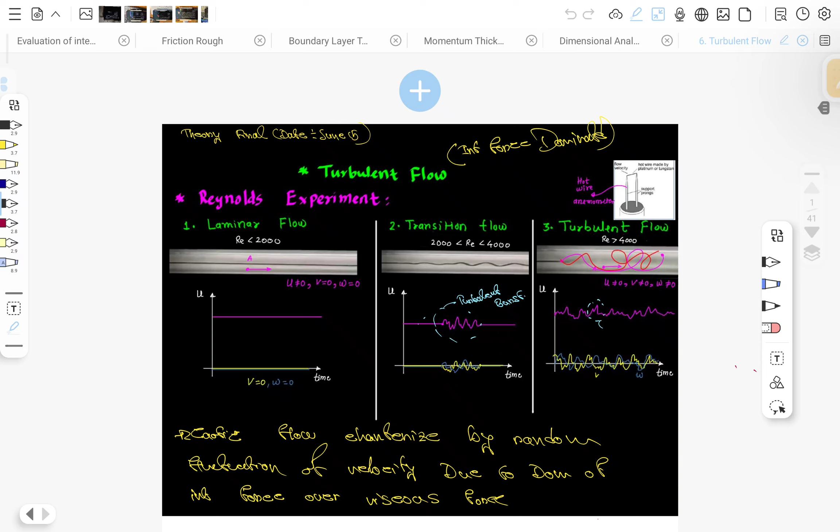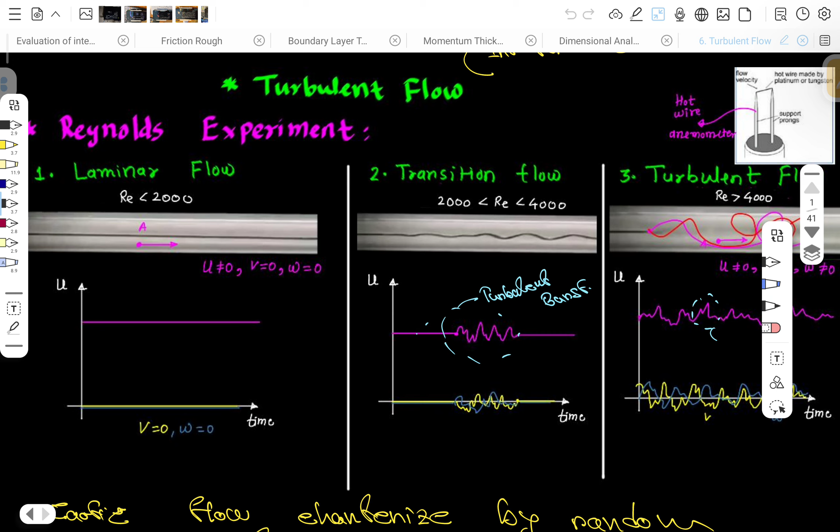Turbulent flow is random fluctuation of velocity due to dominance of inertia force over viscous force. The characteristics are heavy mixing, the motion of fluid particles is highly unpredictable, even the overflow of the fluid is unpredictable. All the components of velocity are present in turbulent flow.

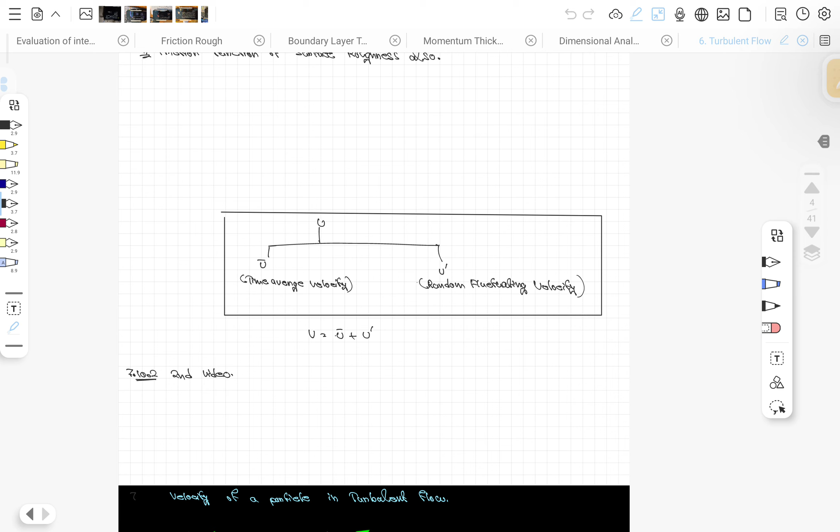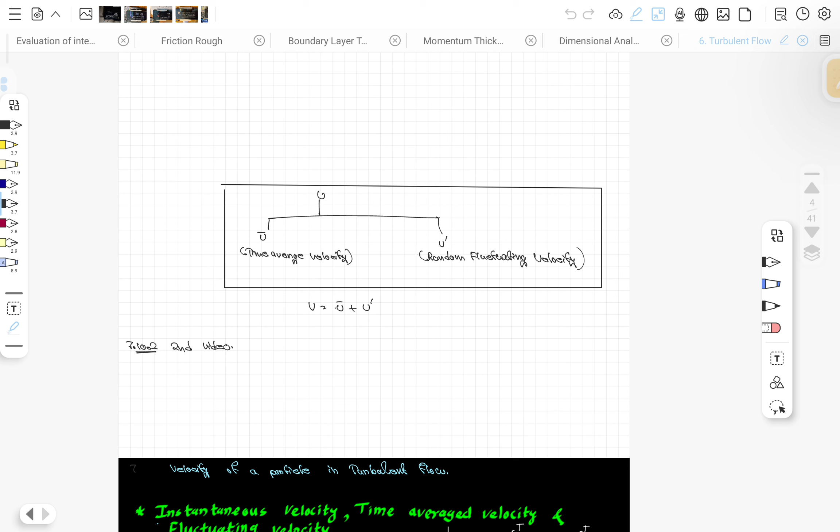Now there is velocity. There are two types of velocity: time average velocity and random fluctuation velocity. Time average is denoted by u bar and random velocity is denoted by u dash. Total we can say u equals u dash plus u bar. In the next part we can get instantaneous velocity, time average velocity, and fluctuating velocity, all those things.

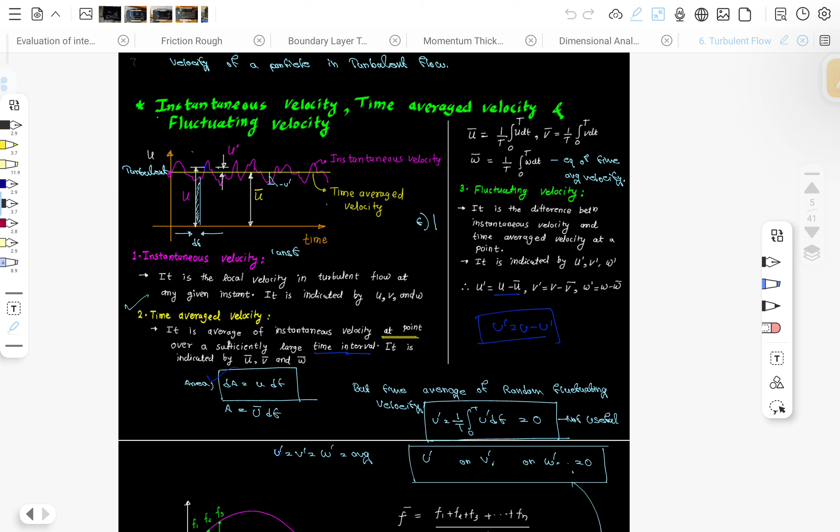So what is instantaneous velocity? It is the velocity of the turbulent flow at any given instant, and it is indicated by u, v and w. Now coming to the second one, time average velocity.

It is the average instantaneous velocity at any point over a sufficiently large time interval. It is denoted by u bar. So dA equals u dt, that is u bar dt.

That's how u bar equals 1 by t, integral from 0 to t of u dt. Similarly v bar equals 1 by t, integral from 0 to t of v dt. That's how we formulate the velocities.

Now fluctuating velocity: it is the difference between instantaneous velocity and time average velocity, that is u minus u bar, that is the fluctuating velocity. The average random fluctuation, u dash, is 1 by t integral from 0 to t of u dash dt, which is not useful here.

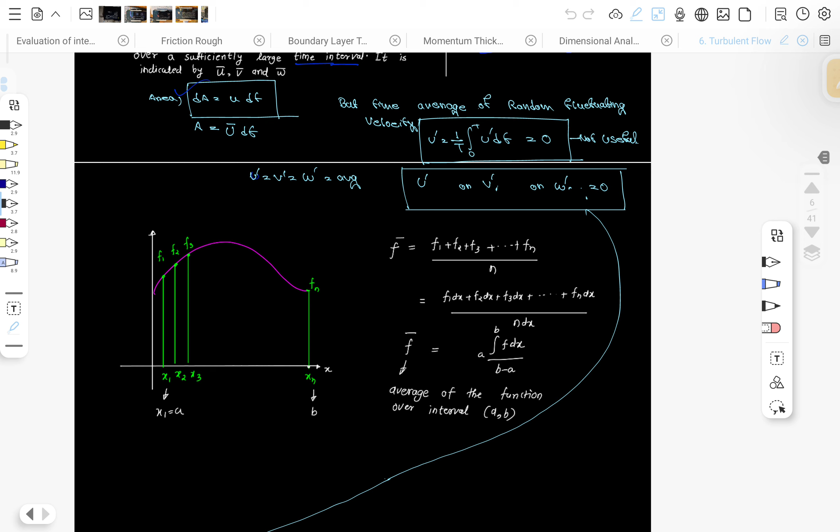Now the most important part: we take the square and add it up, so u dash square equals 1 by t, integral from 0 to t of u dash squared dt. Now most important is the RMS value, root mean square, u RMS squared equals 1 by t integral from 0 to t of u dash squared dt. That's the RMS of the random fluctuating velocity.

Intensity of turbulence is 1 by 3 times the sum of u dash squared, v dash squared, and w dash squared, that is the RMS velocity squared. But we can't eliminate the 3.

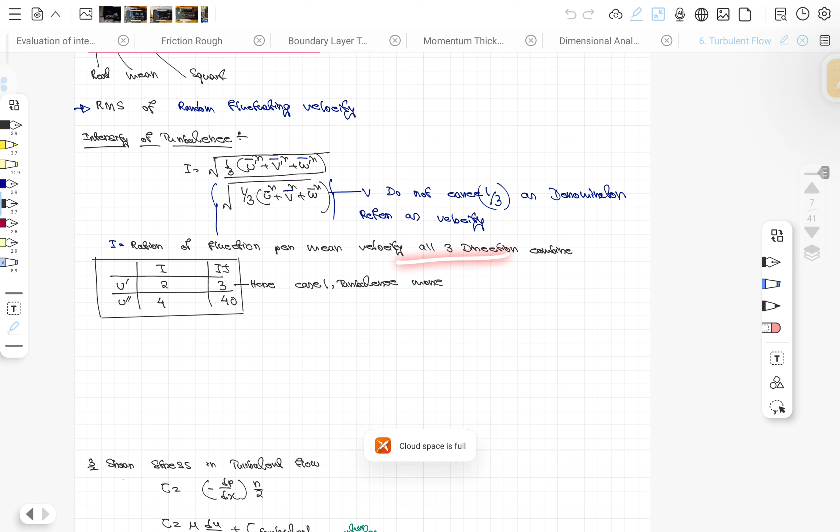Now the shear stress in case of turbulent flow: tau equals minus dp by dx into r by 2, as seen with the boundary layer thickness. But here there's one more term, tau equals mu into du by dy, similar to laminar flow, but there is also a turbulent shear stress, which is due to momentum transfer.

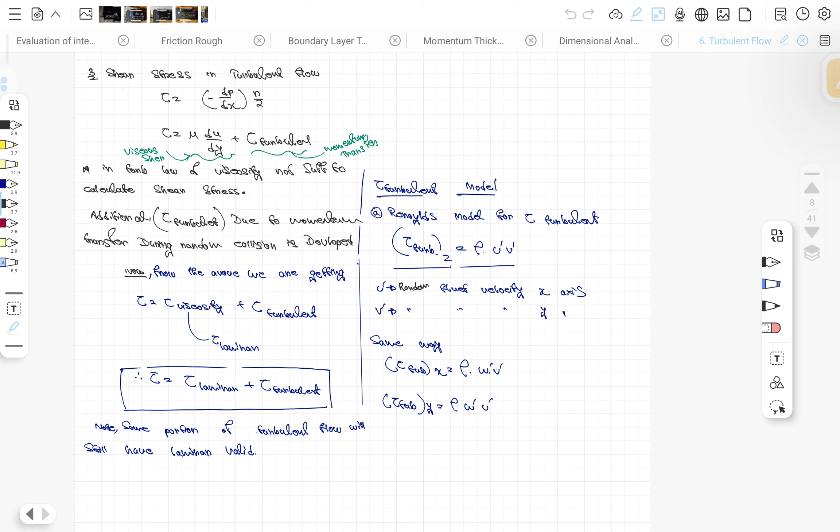So in turbulent flow, viscosity alone is not sufficient. Additionally, due to momentum, there is random collision development. So overall we get tau equals tau viscous plus tau turbulent. Both of these add up to give the total shear stress: tau total equals tau laminar plus tau turbulent.

So Reynolds model for tau turbulent: tau turbulent equals rho into u dash v dash. That's not very important. U dash is random fluctuation in the x axis, v dash in the y axis. Similarly, tau turbulent can be rho times w dash v dash, or rho w dash u dash.

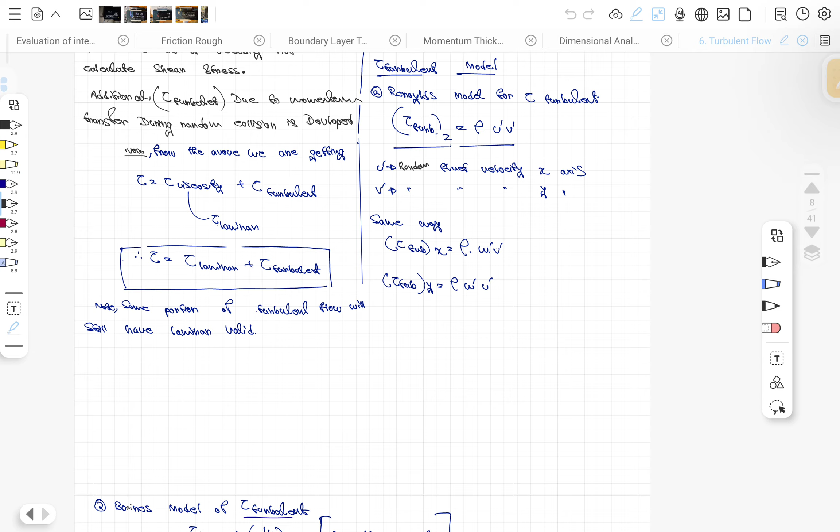Now the Boussinesq equation, I don't think it's very useful, but you must remember this: eta is eddy viscosity, so mu into eta is eddy viscosity du by dy. So mu into du by dy happens, but in this case it's mu plus eta into du by dy.

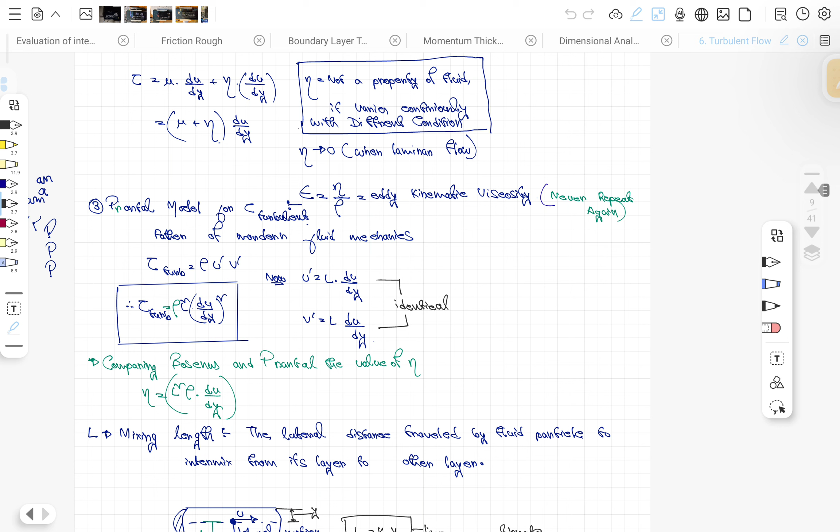It is not a property of the fluid, it varies continuously with different conditions. When eta is 0, then it reduces to the laminar case. This is the Prandtl model. There's also a comparison with the Boussinesq model, which I also don't think is very useful, but just have a look.

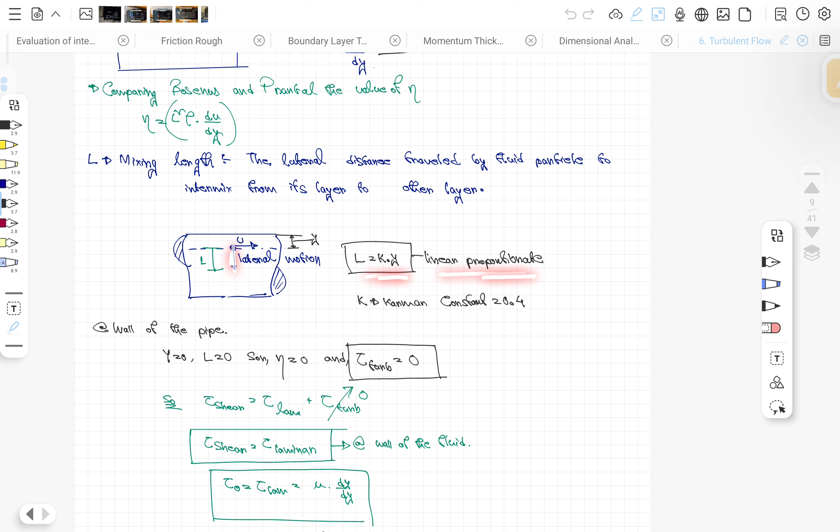There is mixing length, L equals K into Y, which is a linear proportionality for lateral motion, L equals K into Y. K is the Kármán constant, that is 0.4, and at Y equal to 0, adjacent to the layer, there is an L0 distance.

The eta value would be 0, tau turbulent also will be 0 because there is a laminar flow that will happen there. So the tau shear stress will be laminar plus turbulent. So tau shear will be tau laminar only, because there will be no turbulent flow where y, the distance from the wall, is 0. So tau 0 equals mu into du by dy.

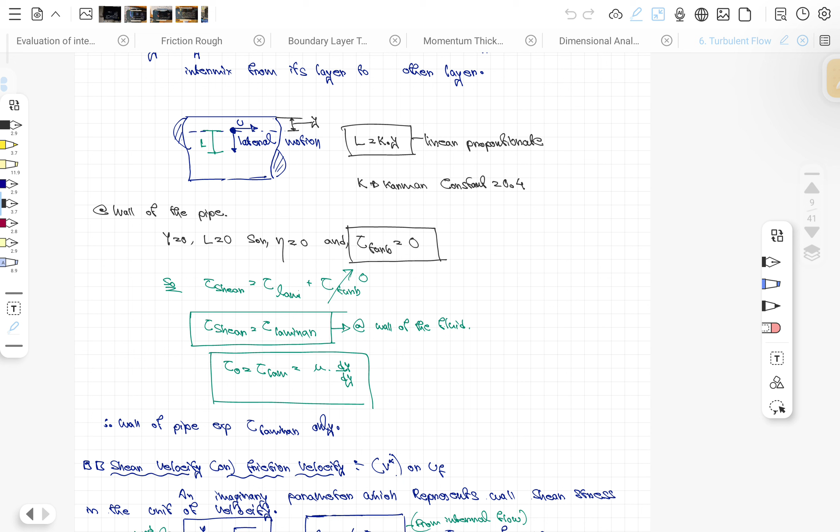So now shear velocity or frictional velocity, that is V star. The standard formula is V star equal to root over tau 0 by rho. F equal to 4 tau divided by half rho V square. I think it is internal flow we are getting. So tau 0 by rho equal to F by 8 dot V square.

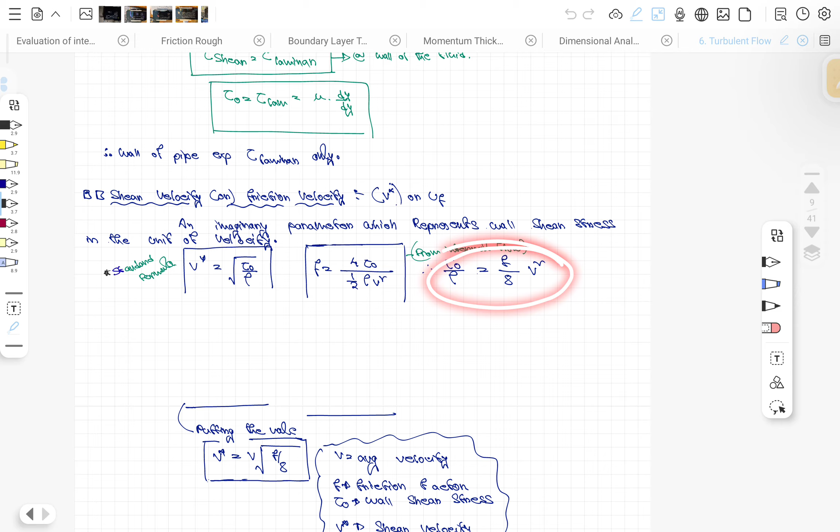Okay. Now putting all these values, we are getting the main equation. V star, the frictional velocity, is V into root of F by 8. F is the friction factor, V is the average velocity, and V star is shear velocity.

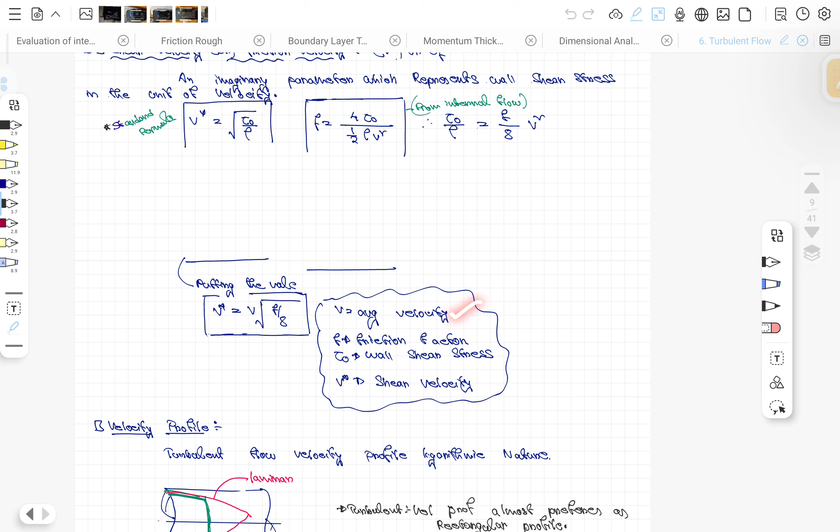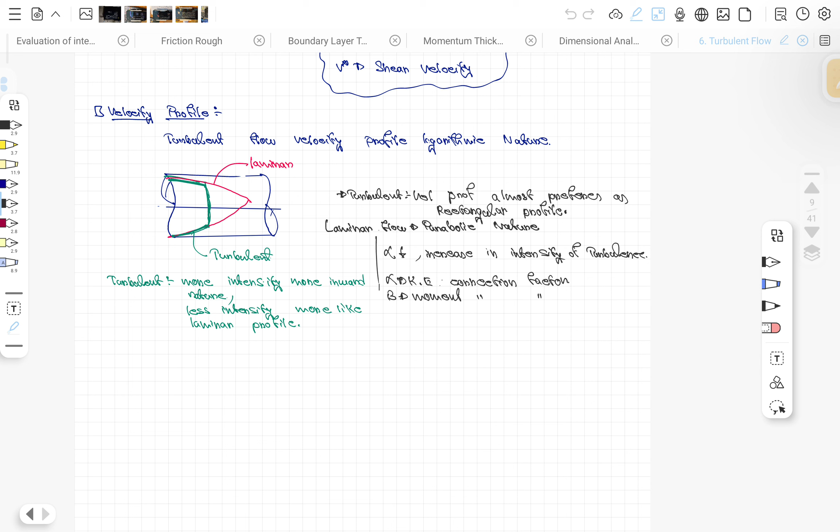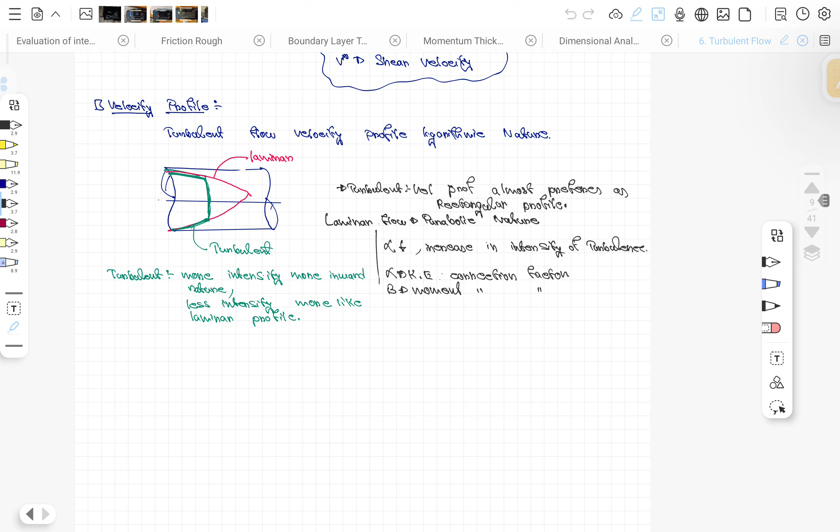Okay, velocity profile for the turbulent flow, this is the velocity profile for turbulent and laminar. The turbulent velocity profile is almost like the rectangular profile. Laminar is almost like parabolic. So as the alpha value is increasing, and what is alpha? Alpha is the kinetic energy correction factor that you need to remember. More intensity, more inward, and less intensity, more like laminar profile.

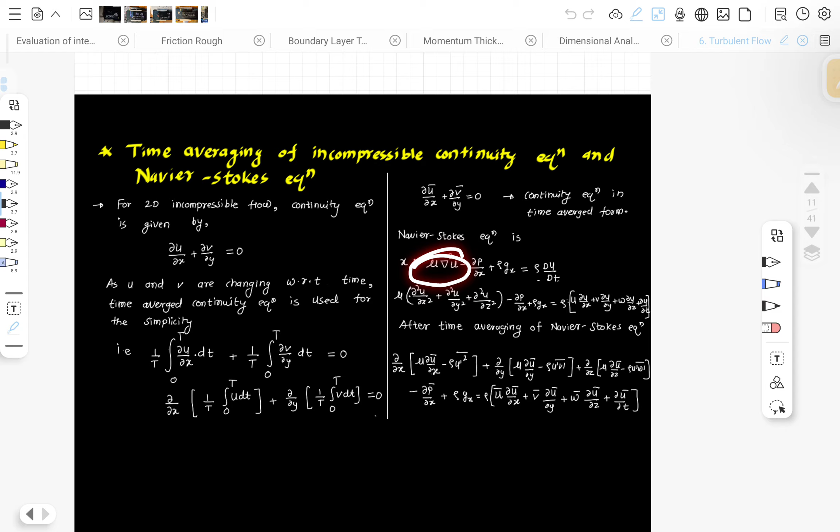Okay, now the Navier-Stokes equation is also useful for these cases. You just remember: du by dx plus dv by dy equal to 0, that is the continuity equation. And the Navier-Stokes in x is rho Du/Dt equal to mu into delta square u minus dp by dx plus rho gx. That also we have seen in many cases we have been applying.

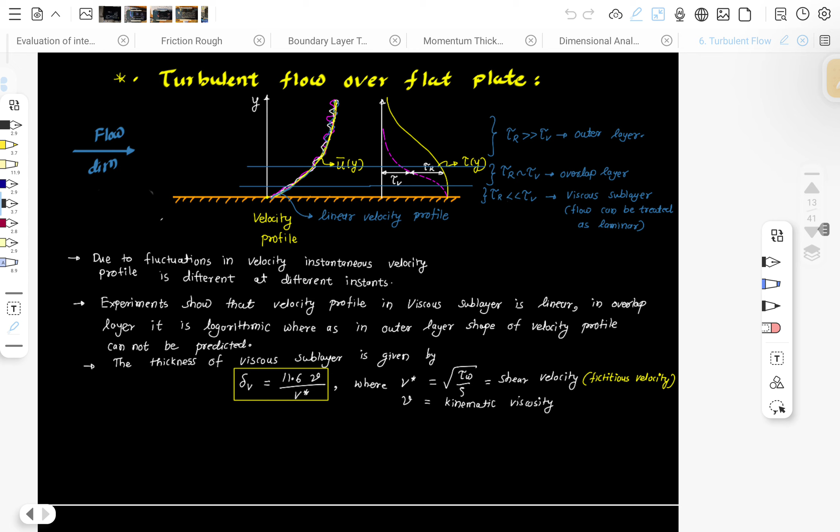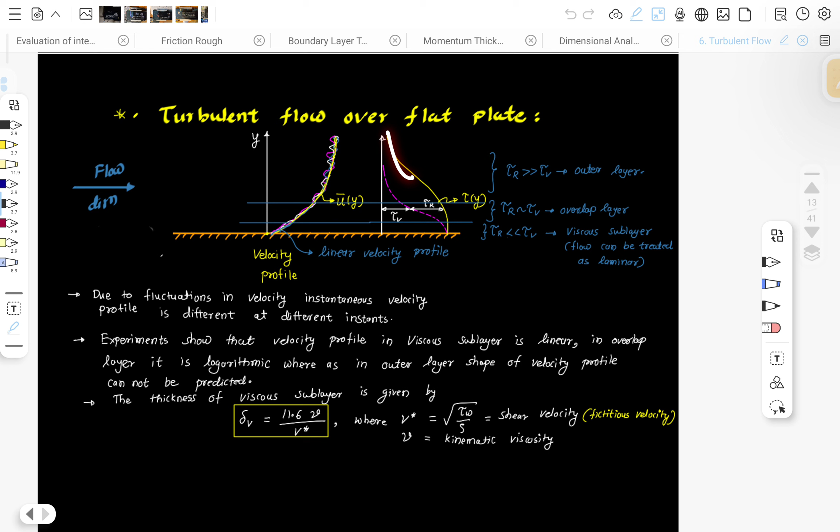So now turbulent flow over a flat plate. How is it happening? Experiments show the velocity profile has a viscous sublayer, overlap logarithmic region, and outer region where the velocity profile cannot be predicted. The thickness of the viscous layer is delta V, that is 11.6 nu by V star. Shear velocity V star equals root of tau W by rho, and nu is kinematic viscosity.

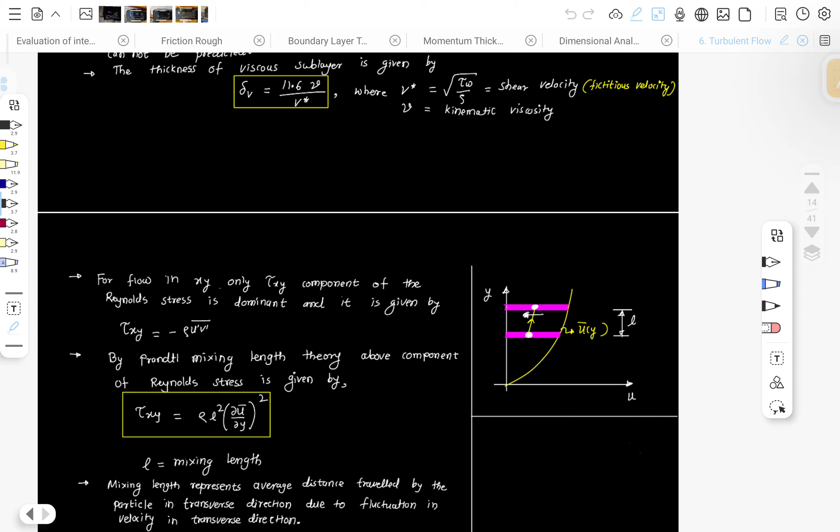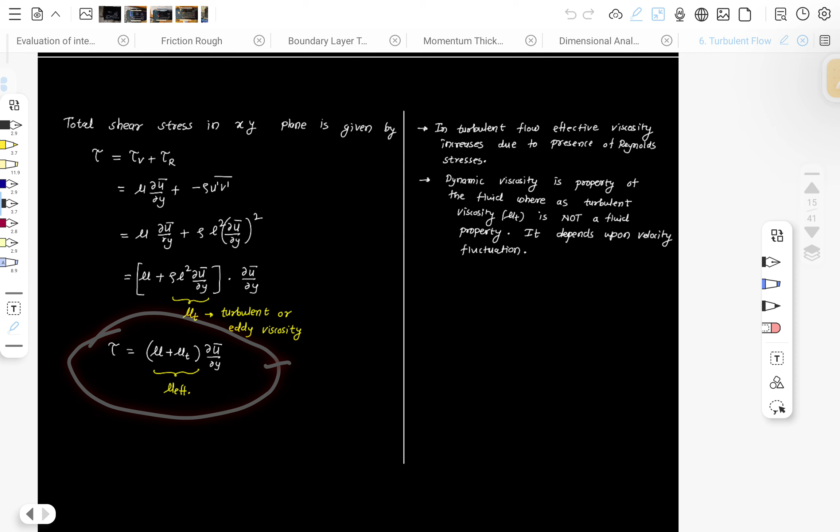The xy component of the Reynolds stress is determined by tau xy equal to minus rho u dash v dash. By Prandtl mixing length, the Reynolds stress component is given by mixing length. So basically tau R equal to mu turbulent into du by dy. The eddy viscosity depends on the velocity fluctuations.

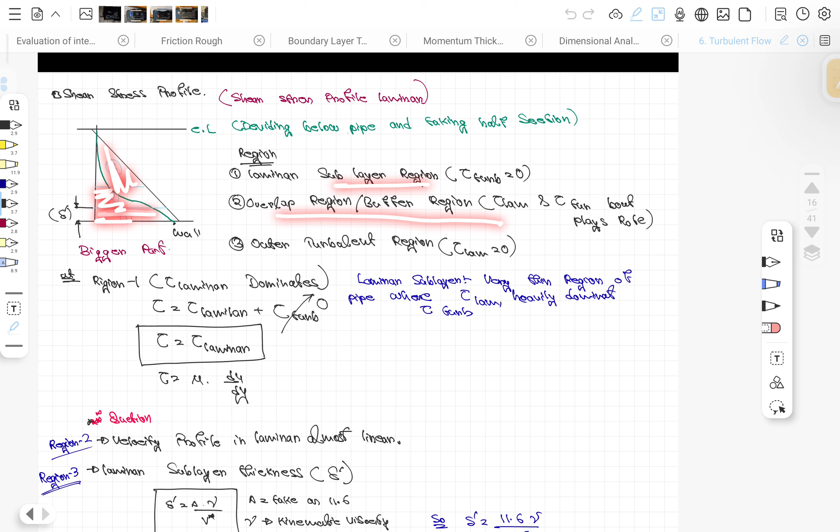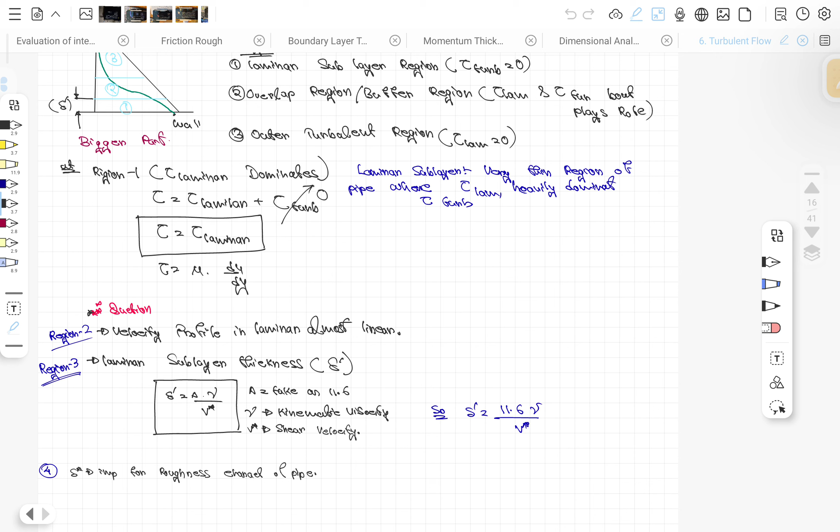Now shear stress profile, there are three regions. One is the laminar sublayer region, two is the overlap region, three is the outer turbulent. In the outer layer tau laminar is 0. In region 1, turbulent is 0, it is mu du by dy. Velocity profile in the laminar sublayer is almost linear.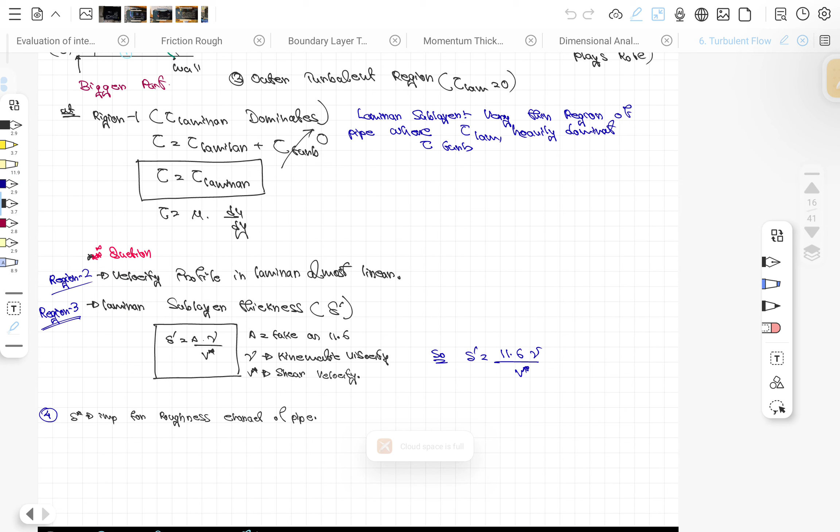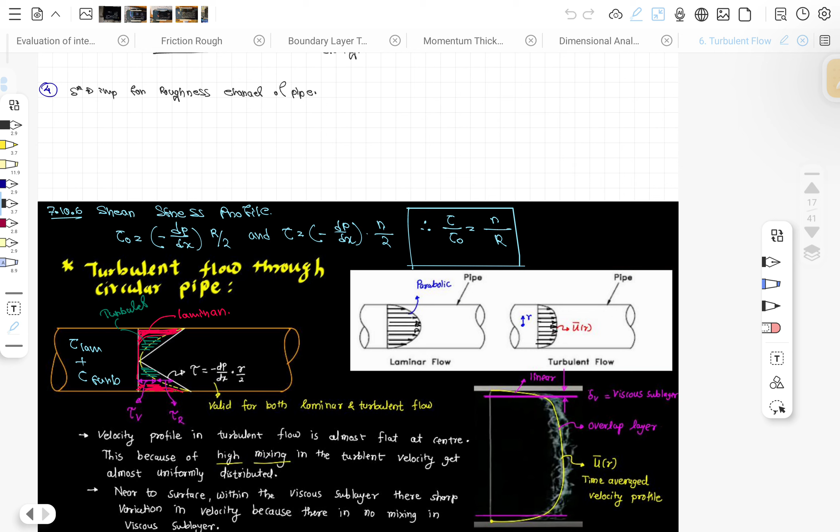Laminar sublayer thickness, that is delta star equal to A into nu by V star, that is 11.6 nu by V star. It is important for roughness characteristics of the pipe. We know that tau equal to minus dp by dx into r by 2. Now tau is tau laminar plus tau turbulent. This is the part where we are getting laminar flow, and this is the part where we are getting turbulent flow.

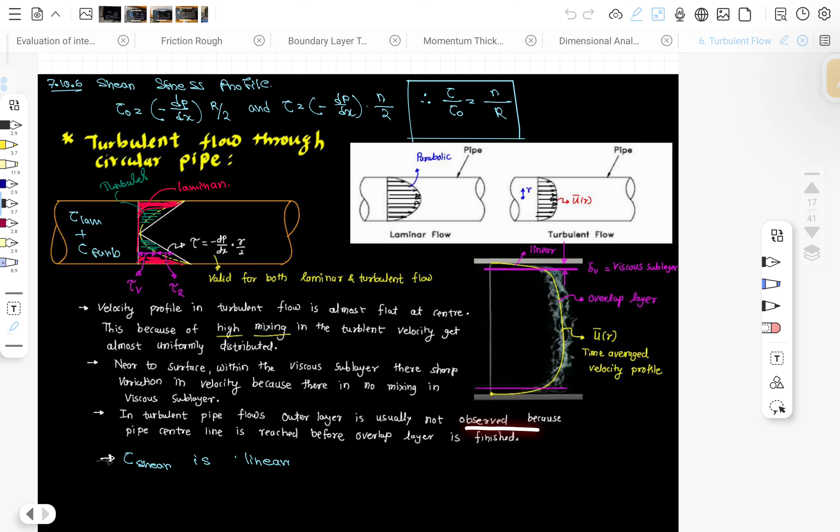So the velocity profile in turbulent flow is almost flat at center, because high mixing gives almost uniform distribution. Near the surface within the viscous sublayer, there is sharp variation of the velocity. In turbulent pipe flow, the outer layer is usually not observed because the pipe centerline is reached before the overlap finishes.

Okay, the logarithmic profile has different equations for smooth and rough pipe. It is approximated by the power law profile u equal to u max into 1 minus r by R to the power n. Now the topic is the roughness of the pipe. There is a laminar layer, and above this is the turbulent flow. So there is no eddy formation at the surface roughness. So the surface is hydrodynamically smooth.

So E is the average height of the irregularity. So E is the surface roughness. Remember, many times it's come. E is the surface roughness, the average height of the irregularity in the inner wall, so this is called E. Okay, E or K, something we got.

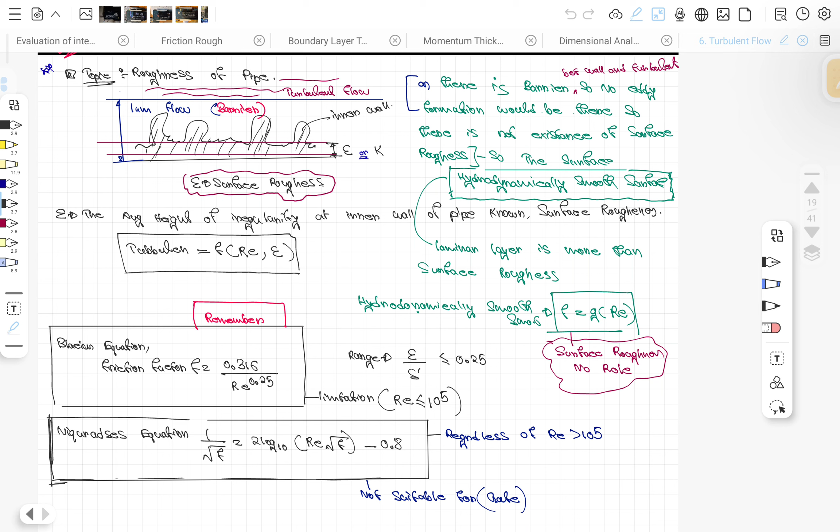Turbulent flow is a property of two things. That is, one is Reynolds number, another is surface roughness, that is denoted by K or epsilon, whatever you can say. Laminar layer is more than surface roughness. So what we are saying is the laminar sublayer is more than the surface roughness.

Okay, hydrodynamically smooth surface, that is a function of only Reynolds number, because E will not play any role. And remember Blasius equation of the friction: the friction factor F is 0.316 divided by Reynolds number to the power 0.25. And the range for this is E by delta star. Delta star is the laminar sublayer thickness, and E is the surface roughness; that has to be less than 0.25.

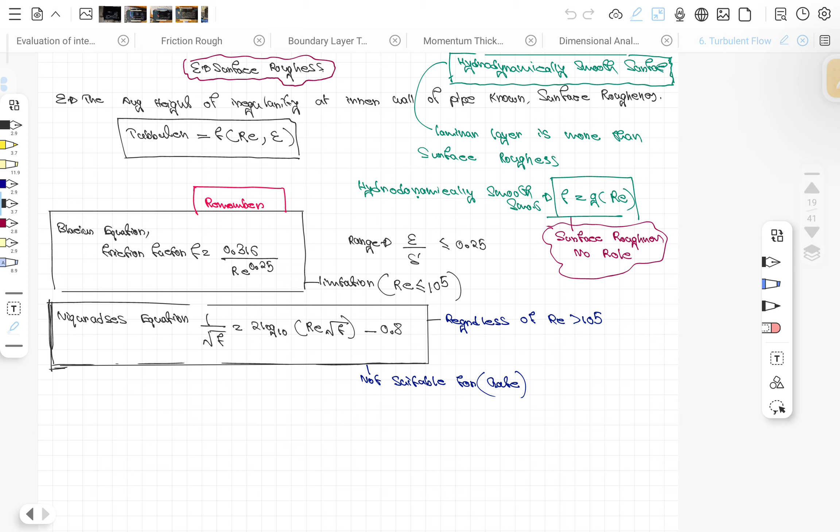Okay, so this Blasius equation, as far as I know, is valid when Reynolds number is less than 10 to the power 5. Okay, hydrodynamically smooth surface, the next thing that we are getting. So for a hydrodynamically smooth surface, K by delta is less than 0.25, and a rough surface is where K by delta is greater than 6.

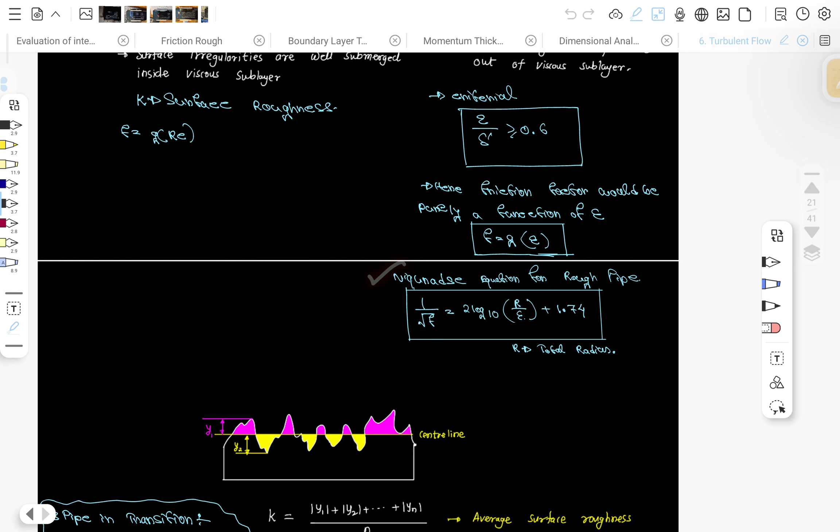So experimental data: if E by delta star is greater than 6, the friction factor depends only on E. Nikuradse's equation is 1 by root F equals 2 log 10 R by E plus 1.74. So I don't think it is very much needed. So pipe in transition: there is a central line, a laminar sublayer and surface roughness. So E by delta star from 0.25 to 6, that is the value.

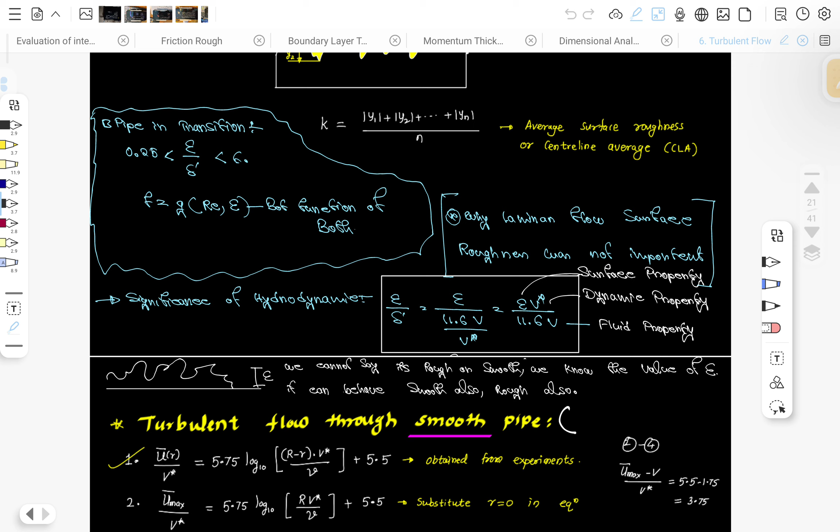So while in laminar flow surface roughness was not important, here's the question. So delta star equals 11.6 nu by V star, where V star is the shear velocity. Okay, now turbulent flow, there are a couple of equations that are important that I will share. So let me just remove this thing first.

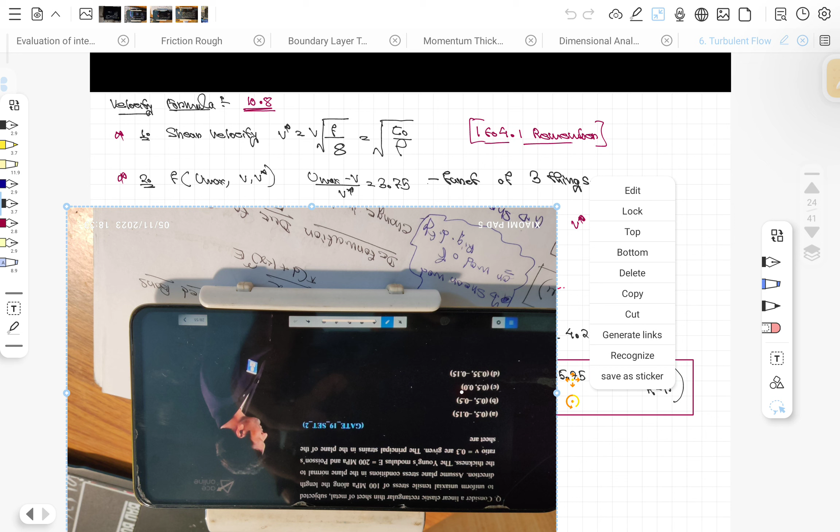Now start. Shear velocity V star equals V into root of F by 8. Also you can write root over tau 0 by rho. So Umax minus V by V star equals 3.75, where F is the friction factor. Umax by V equals 1 plus 1.43 root F, putting the value of V star.

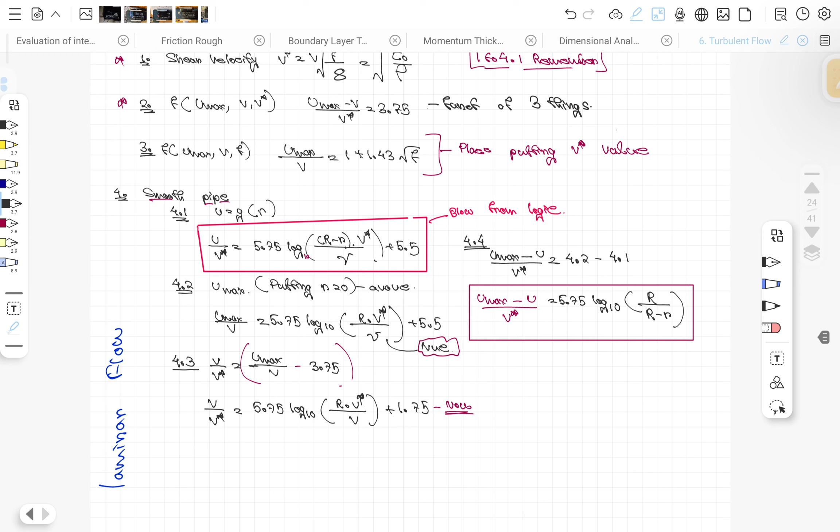So for smooth pipes, U by V star equals 5.75 log R V star by nu plus 5.5. And putting the above value, Umax by V star equals 5.75 log 10 R V star by nu plus 5.5. So V by V star equals Umax by V star minus 3.75, and V by V star equals 5.75 log R V star by nu plus 1.75. So these first four equations are important, but we don't need to remember them.

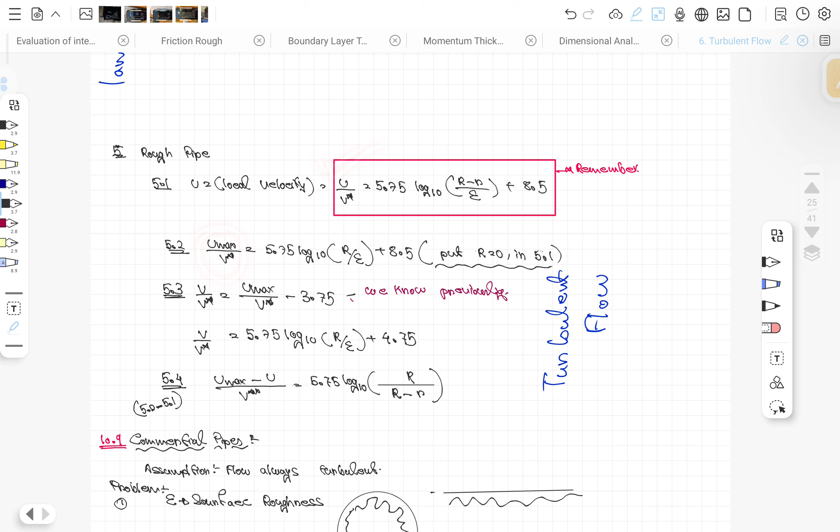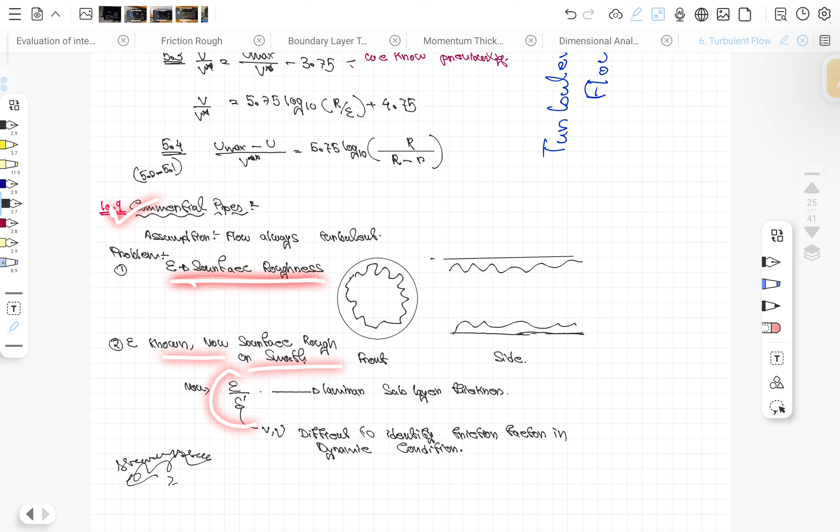Then we are coming to the rough pipe case. So the first equation that is very important is U by V star, the velocity divided by the shear velocity, equals 5.75 log 10 R by epsilon plus 8.5. And Umax by V star equals 5.75 log R by E plus 8.5. Then there is commercial pipe, where the surface roughness is known as the equivalent surface roughness.

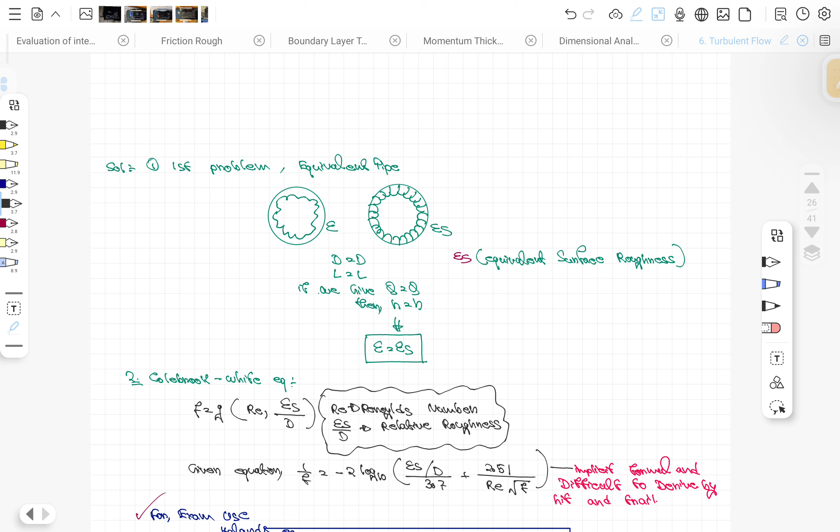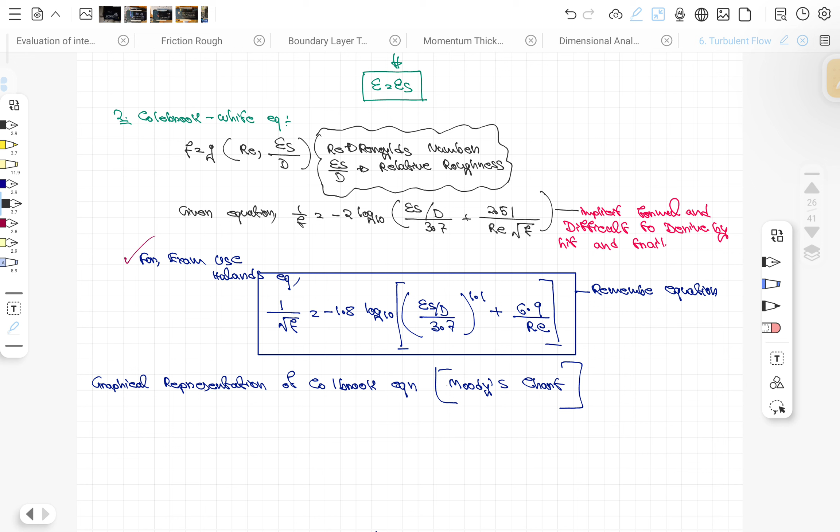So now, equivalent pipe surface, E equals E s for the equivalent. Now the Colebrook equation is an implicit formula, solved by hit and trial: 1 by root F equals minus 2 log 10 of E s by 3.7 D plus 2.51 by Re root F. That is, for the equivalent pipe, E s is the surface roughness. Now the term is E s by D.

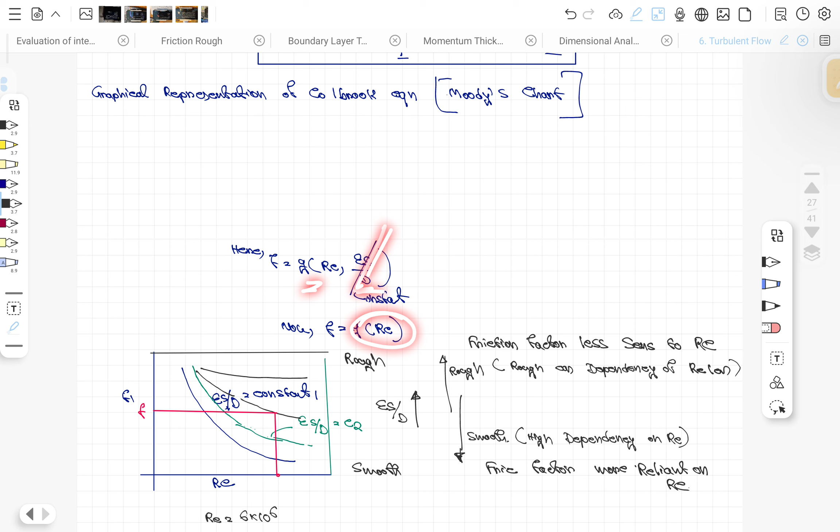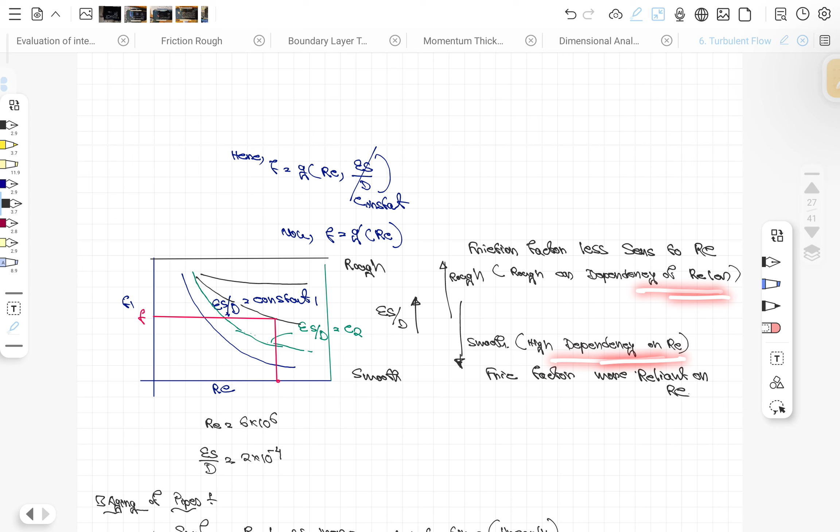So the friction factor depends only on Reynolds number here, and as Reynolds number increases along this line, E s by D is decreasing. As E s by D is increasing, roughness increases, and there is less dependence on Re. So how is it going? Let's see.

Okay, I don't think I know more things.